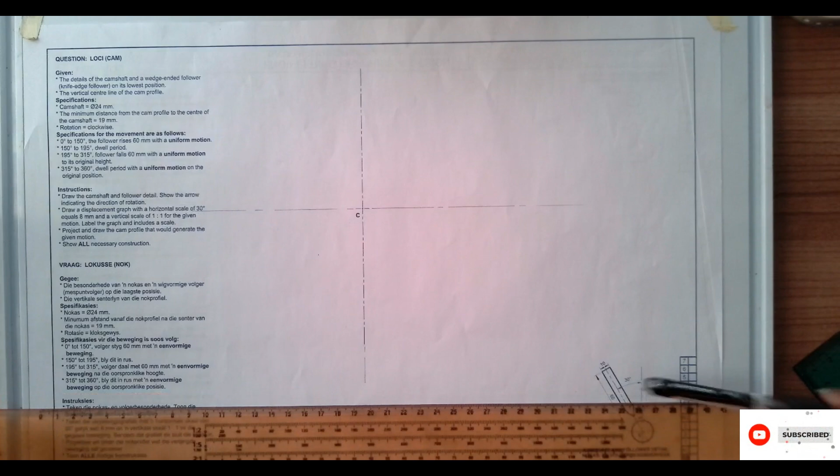Today we'll be doing page 113. We have the information here and we also have a diagram here. In the information under the given, we are given the details of the camshaft and the wedge follower in its lowest position as well as the vertical center line. So what I did, I just extended the center line that is horizontal. So you must also do that.

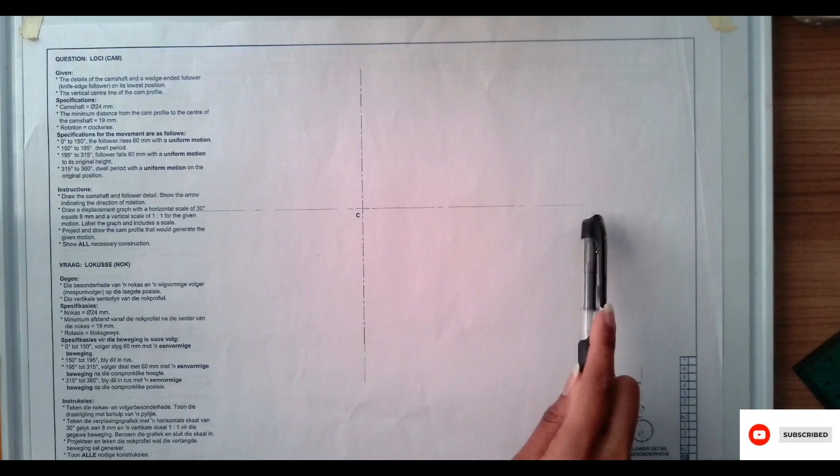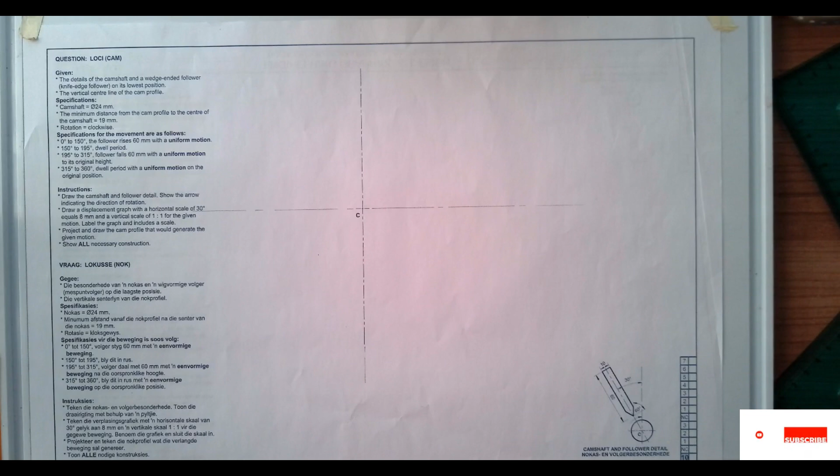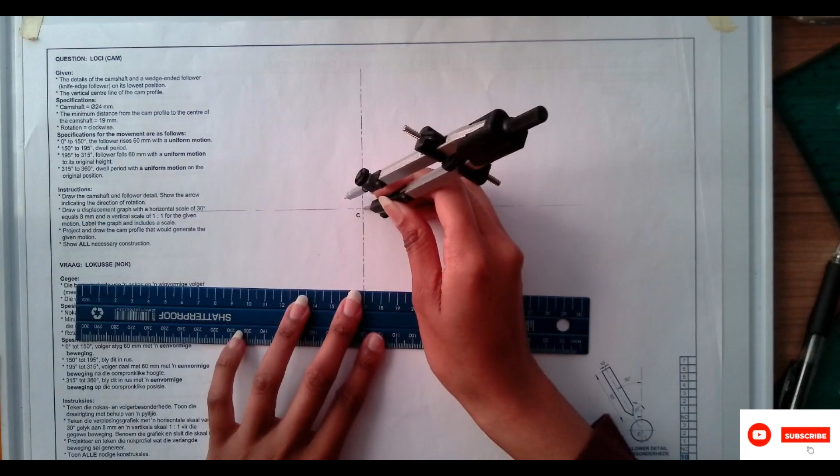And then the specifications are that this camshaft, this circle here, has a diameter of 24. Let me see if my stencil, oh gosh, it doesn't match. It means I have to take my compass, open radius 12, and then draw a circle that's 24 millimeters. Oops. Make sure that I zoom it properly. So once you have that, immediately take your set square and hatch because it is a shaft. So you want to hatch that using a B line.

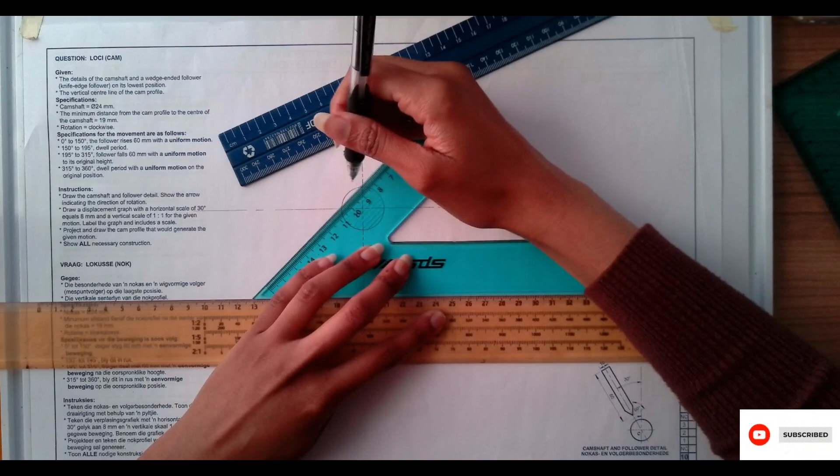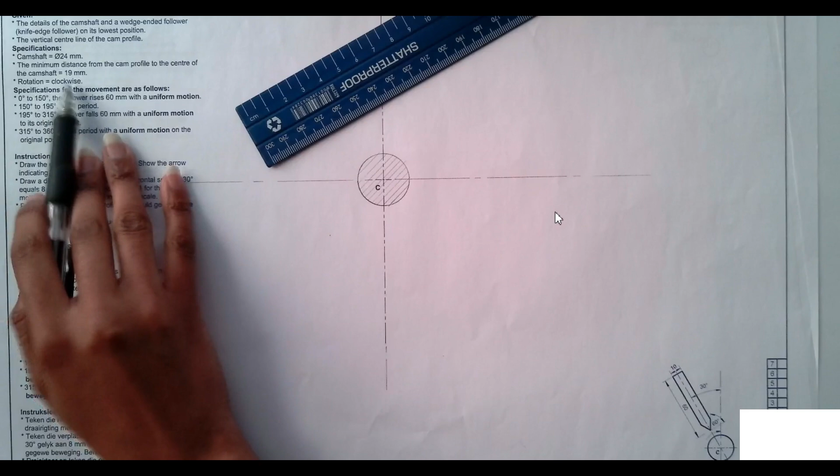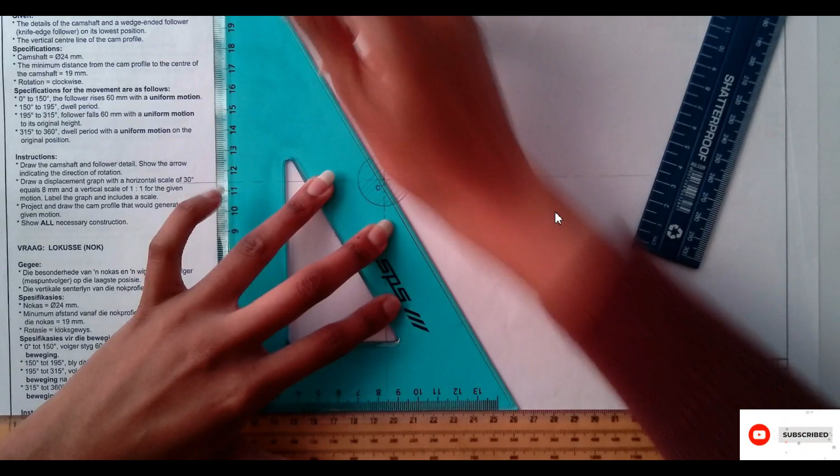So once you're finished with the hatching, you can carry on copying. We can carry on copying this part here, and we are still under specifications. We are told that the minimum distance of the cam profile to the center of the camshaft is 19 millimeters, and we can see that here there's a 30 degrees. The follower is sitting at 30 degrees, so we're going to take our 60 and draw a center line from the center. So if you put it like that, it is 30 degrees. That's why we are told that this angle is 30 degrees.

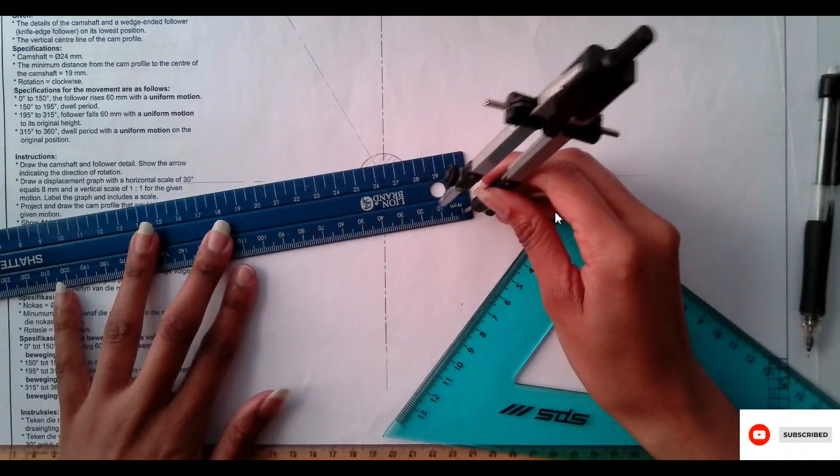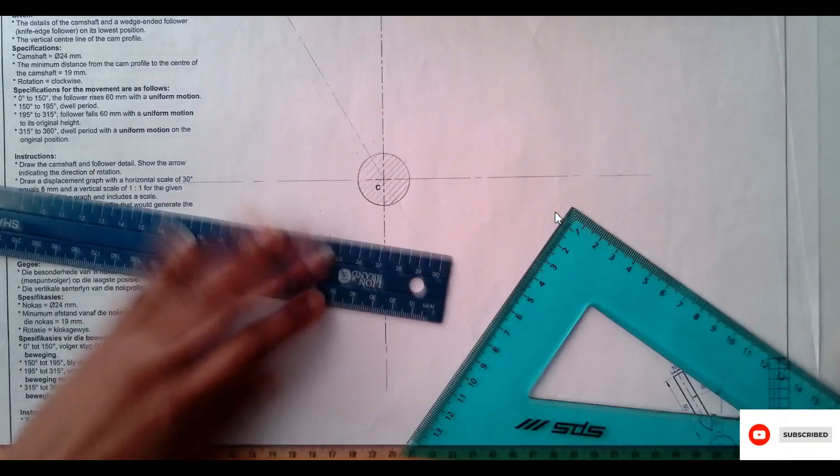And then we can start. We are told that the minimum distance is 19 millimeters. So you open 19, you place it in the center and you mark that distance. Once it's marked, then you can go out 5 on each side because it has a width of 10. So we have 10, and then from here the distance is 16 millimeters.

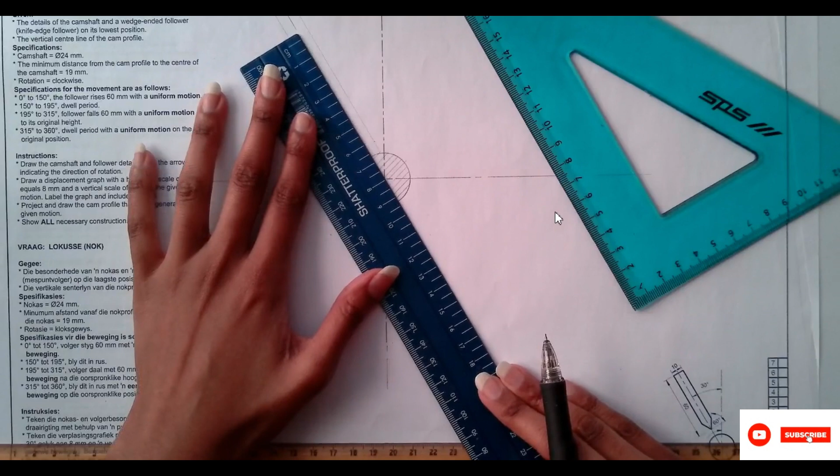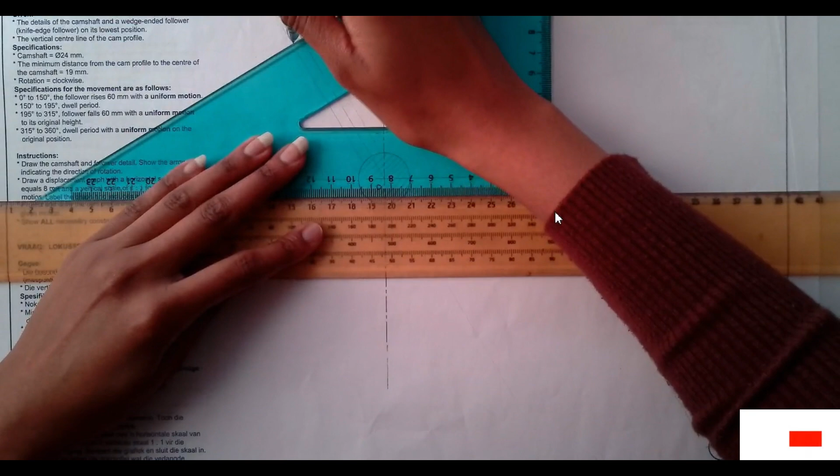So from the 19 we measure 16 up, which is there, and then we're told that the angle there is 60. So if it's 60, that means we're going to use 30 millimeters. So we have to stop. We have to have the pin here.

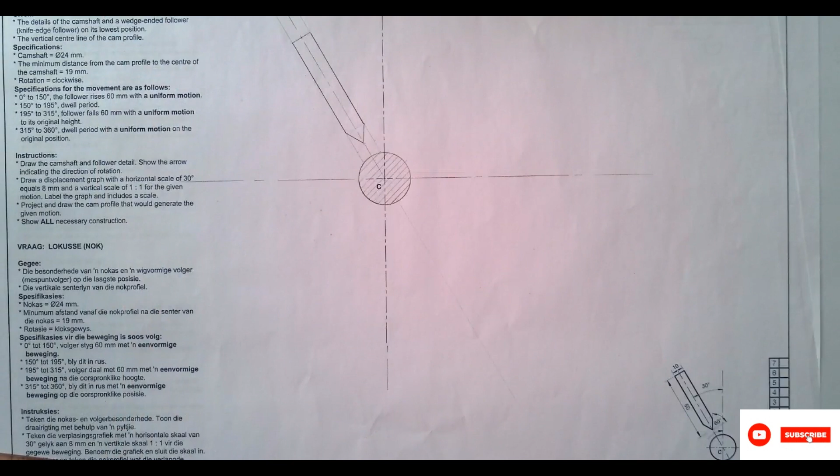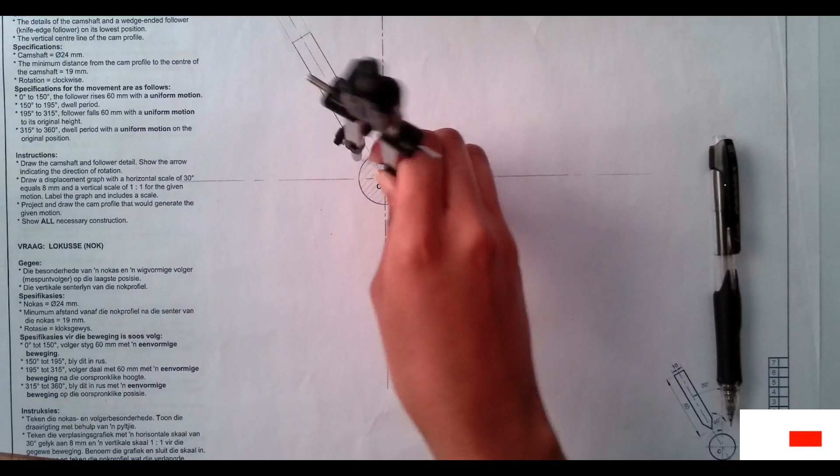And then we are told that the direction is clockwise. So immediately, from the center, I'm just going to increase that 19 and draw my direction. So these three things are very important to do: the camshaft hatched, the direction, and the follower. Any other thing comes afterwards.

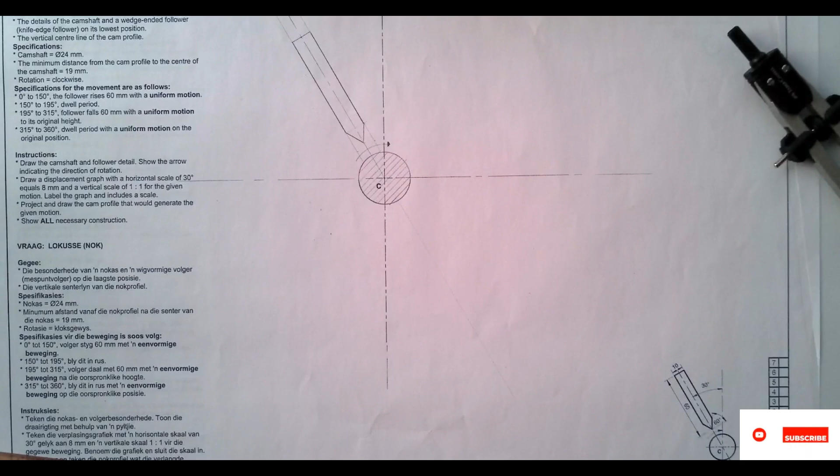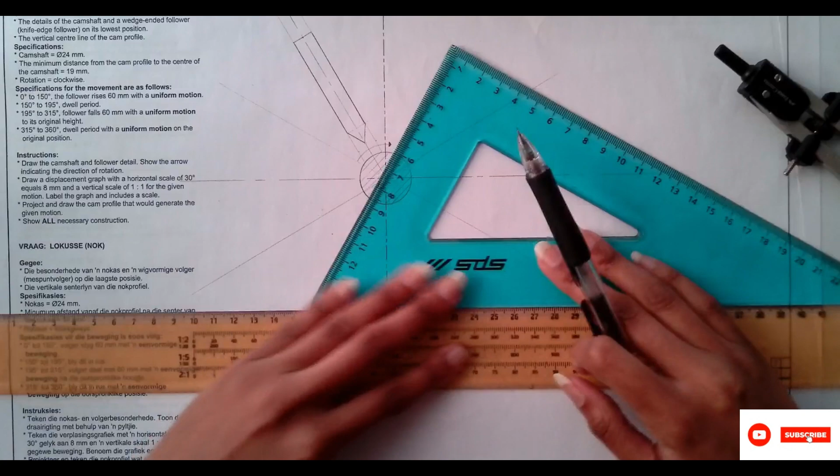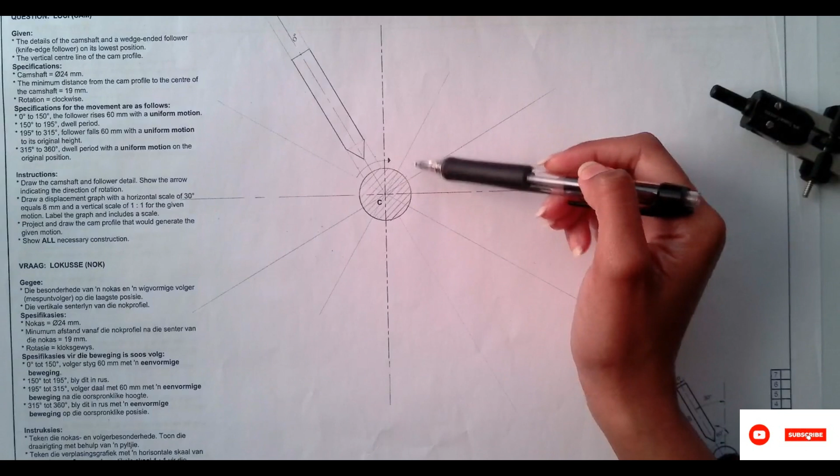Once we have done what's under the specifications, we now need to prepare for indicating the motion. We do that first by dividing this shaft into 12 equal parts. Okay, and then you always label 0 where the follower is. That is your 0 degrees. But where you go will be determined by the rotation of the shaft. So you always label in the opposite direction to the direction of the shaft. So if it's going clockwise, we're going to label the motion of the follower anti-clockwise. So I'm just quickly labeling that.

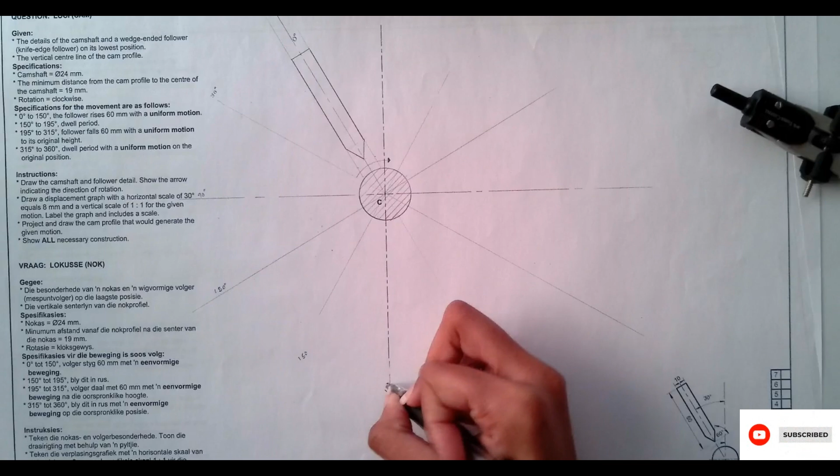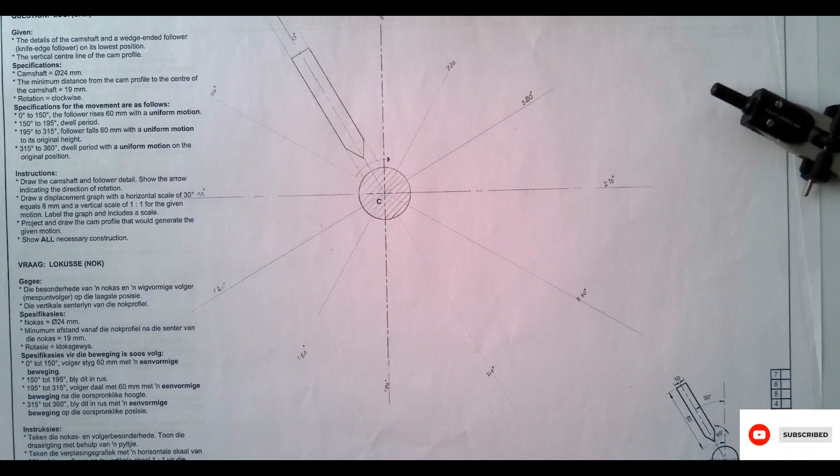Then 120, 150, 180 degrees. Please don't forget the degrees. 300, 330. This does not make sense. I made a mistake early into the drawing. My labeling was off. So I was wondering why 360 is not at 0. I didn't get 60 degrees.

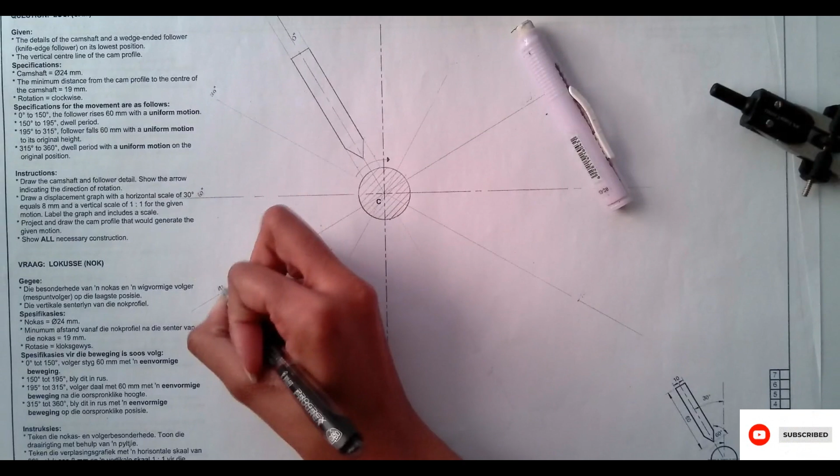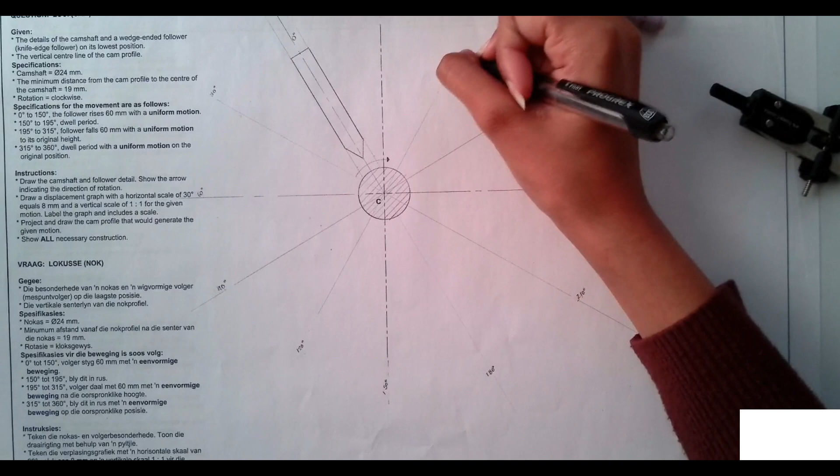90, 120, 150, 180, 210, 240, 270, 300, 330, and 360. Yes, 0 and 360 must always be at the same point. I'm sorry about that.

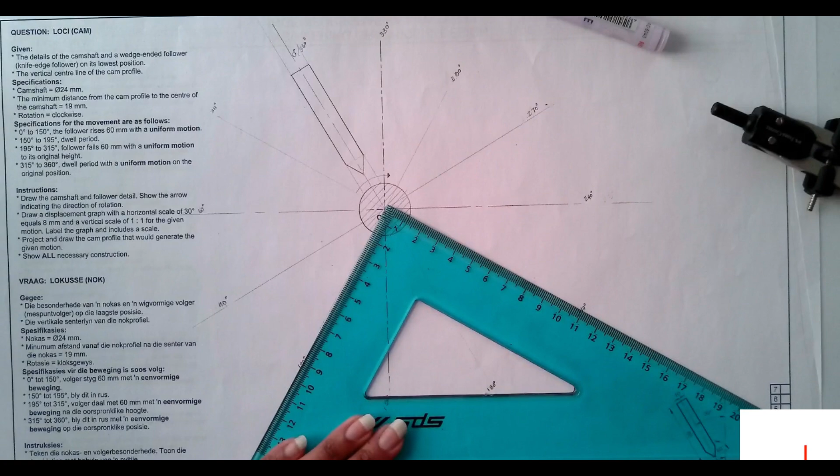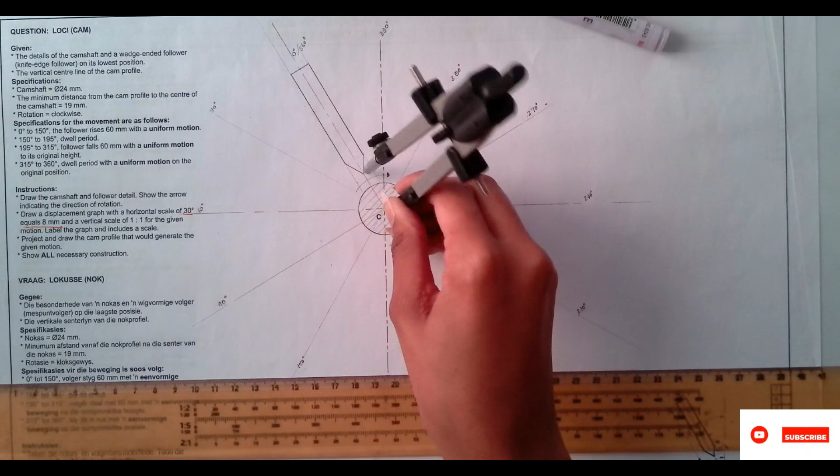Once we've done the preparation for representing the movement of the follower on the cam profile, we can now go to the instructions. We are told to draw the displacement graph with a horizontal scale of 30 degrees equals 8 millimeters, and the vertical scale is 1:1. So in order for us to get the bottom part of the displacement graph, we have to put our pin in the center and then go to the point of the wedge follower and then transfer that end point there to the center line.

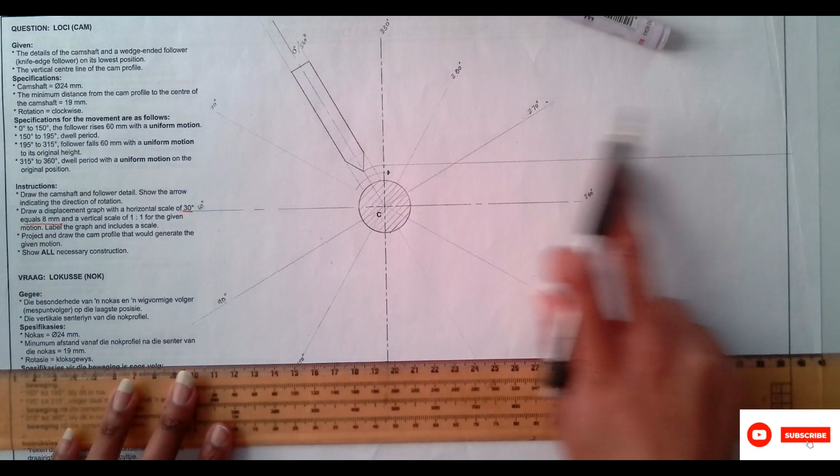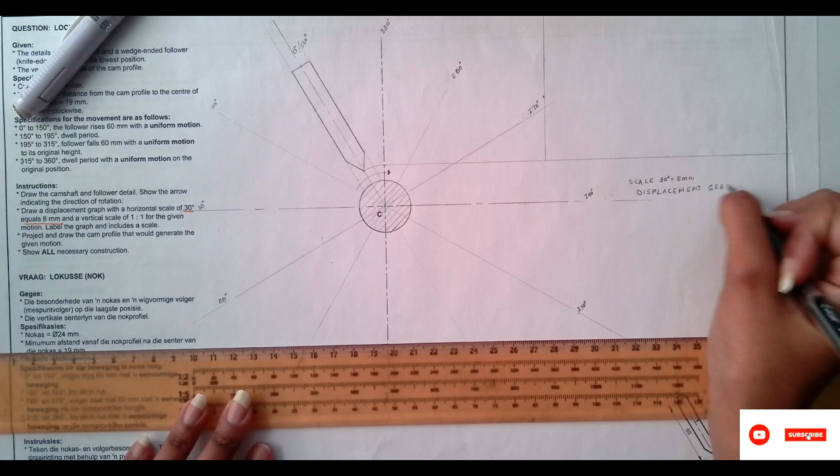Once that is done, you transfer that across. So please always make sure that the bottom part of your graph is in line with the end point of the follower, especially if it is a wedge follower. For the roller follower, it's a different thing. So the scale here, we are told that 30 degrees equals 8 millimeters. This is a displacement graph. You must always label it. There's marks for that. Displacement graph.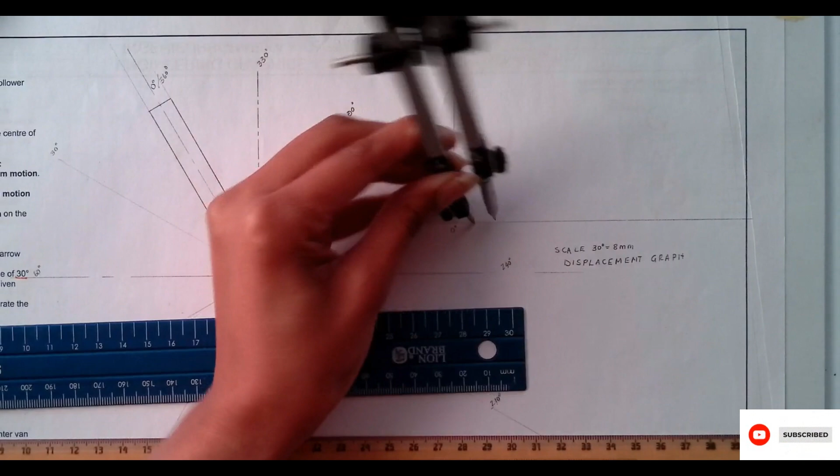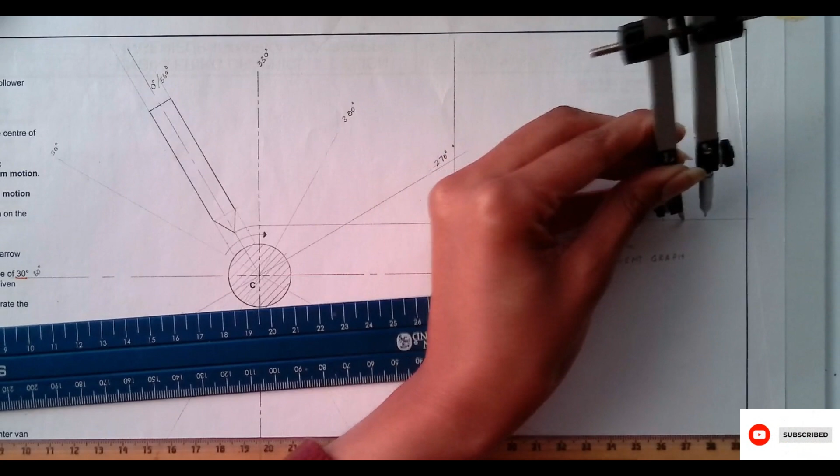So I'm now going to mark 8 millimeters 12 times from my 0 degrees. Just make sure that there's a decent space between your graph and where your profile is going to be. 8 millimeters. Then I'll mark it 12 times. Then label them 30 degrees.

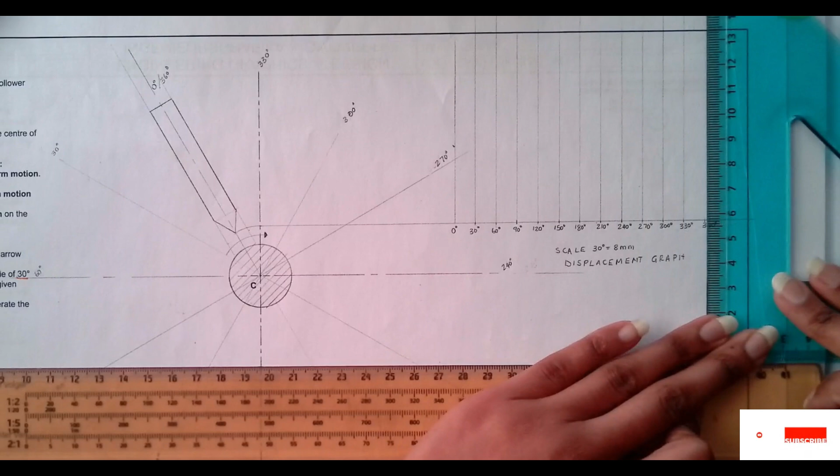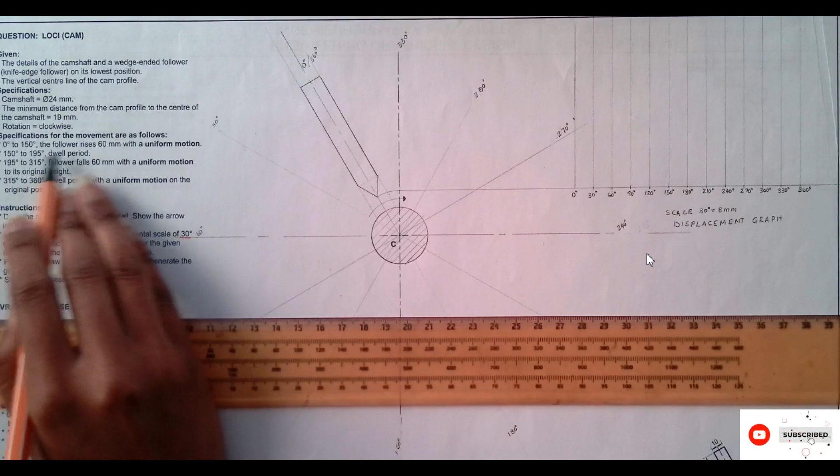So that is our graph. Now we need to plot our points. And now let's read the specifications for the movement of the follower: from 0 to 150 degrees, the follower rises. That's the key word, with uniform motion. And then there's a dwell period, and then it falls again, and then there's a dwell period. So those are the key words that we need to ensure that when we read, we know that

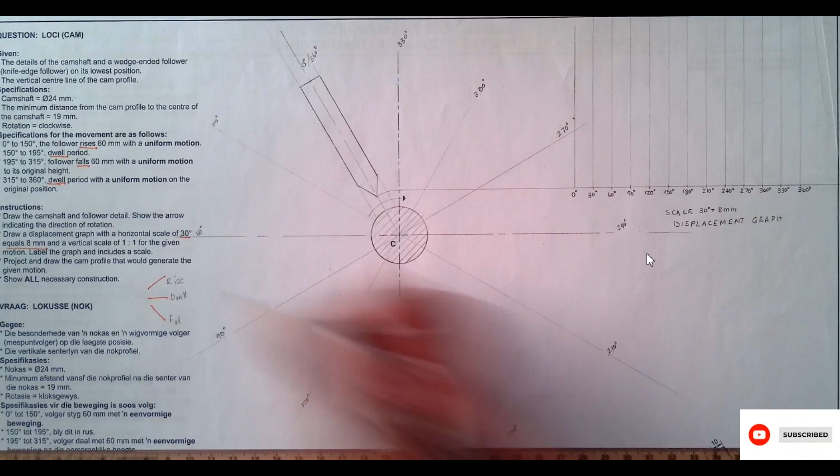once again, we have a rise, we have a dwell, we have a fall. So those are our key words: rise, dwell, fall. So that's how we represent those motions in the graph. So now let us begin. We are told that from 0 to 150, there is a rise of 60 millimeters.

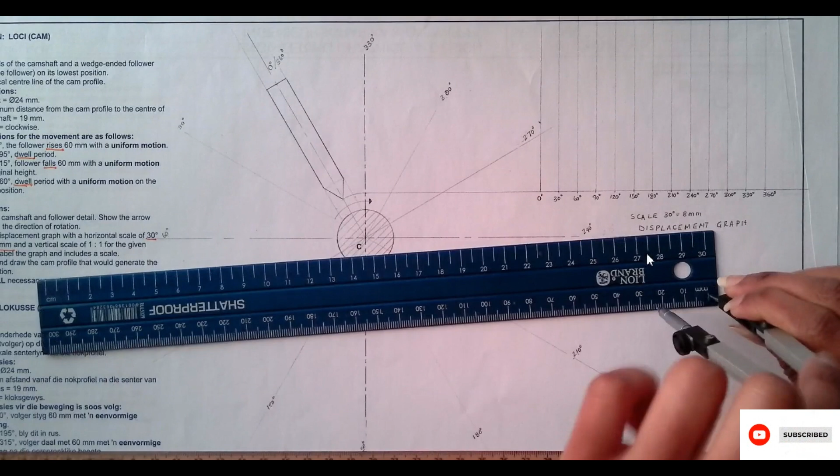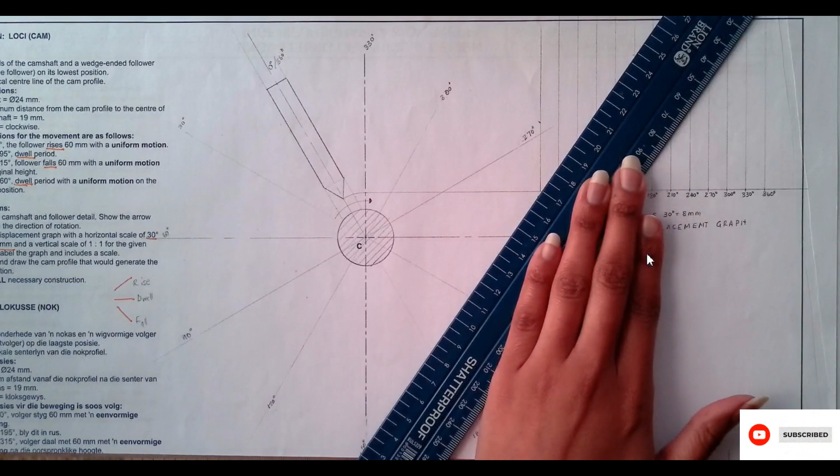You can take your compass or your ruler, it's up to you, and then measure 60. And then they're saying from 0 to 150. So at 150, you are going to mark that 60. And you must then indicate the rise. There is a rise. If you are unsure, you must always start with constructions first.

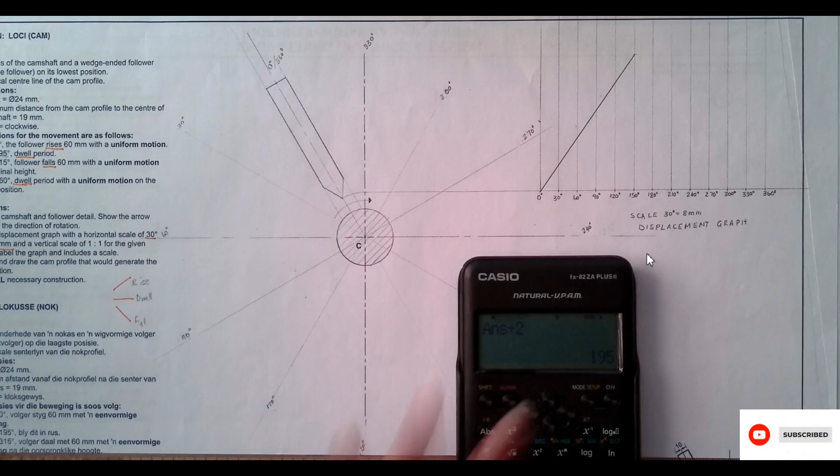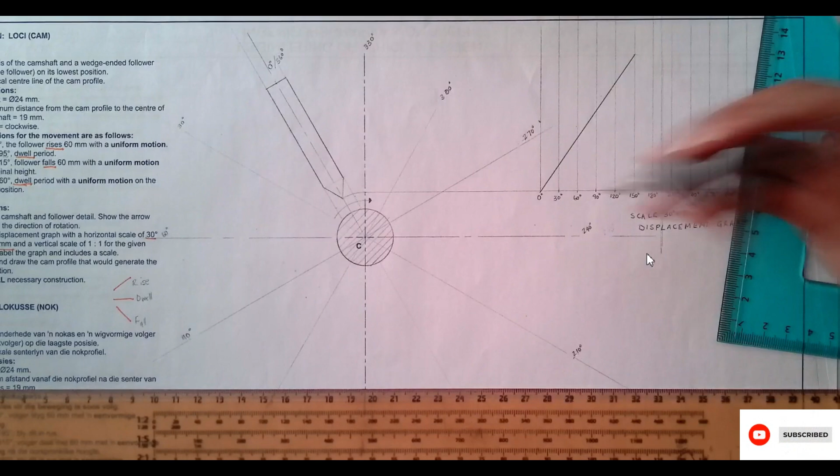And then we are told from 150 to 195. 195 is an angle that can be between 180 and 210. But to confirm that, you say 180 plus 210, add them, divide that by 2, it gives you 195. So since our displacement scale is 30 degrees equals 8 millimeters, we're going to get half of this 8 millimeters to get 195. 195 is the midpoint. So 4 millimeters is there. That's not the one. So this is our 195 degrees. And then at 195, we can now indicate our dwell from there to there.

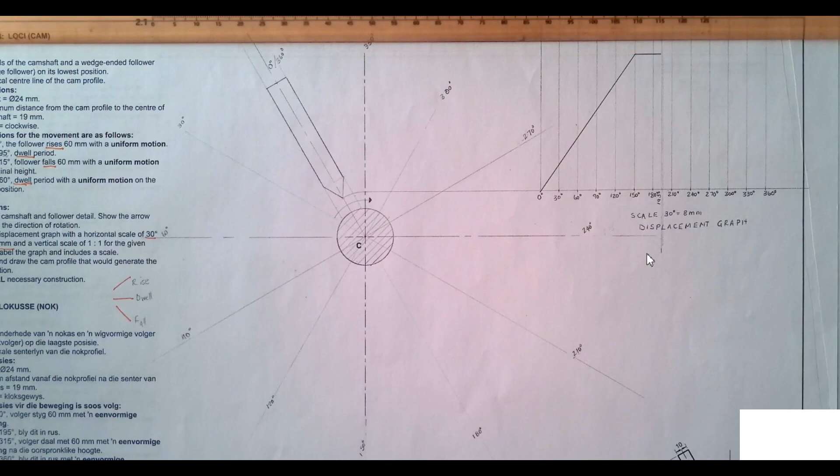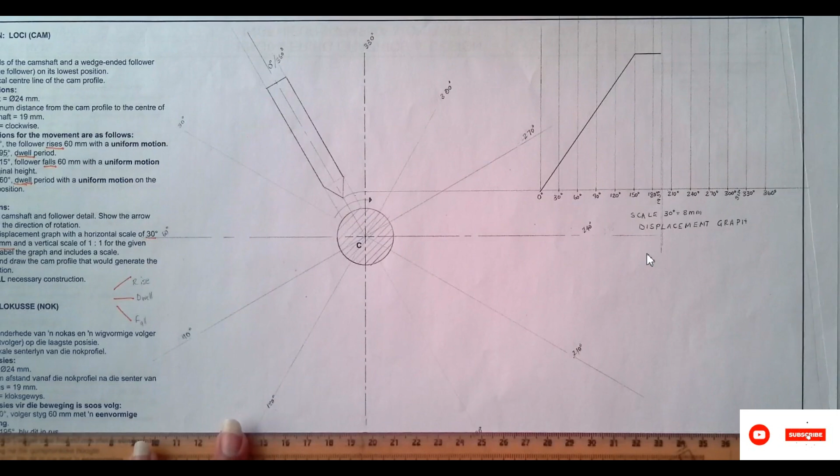And then the third movement, from 195 to 315, the follower falls 60 millimeters. That means we need to get another 315. 315 can be between 300 and 330, and to confirm that, we say 300 plus 330 divided by 2, we get 315. So that means, once again, 4 millimeters between 300 and 330. So this angle here is 315 degrees. There is a fall of 60 millimeters. So we are taking that dwell that we had there

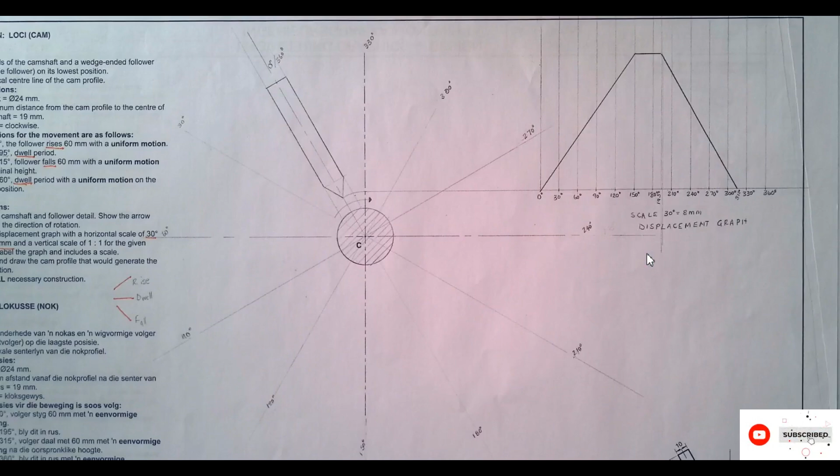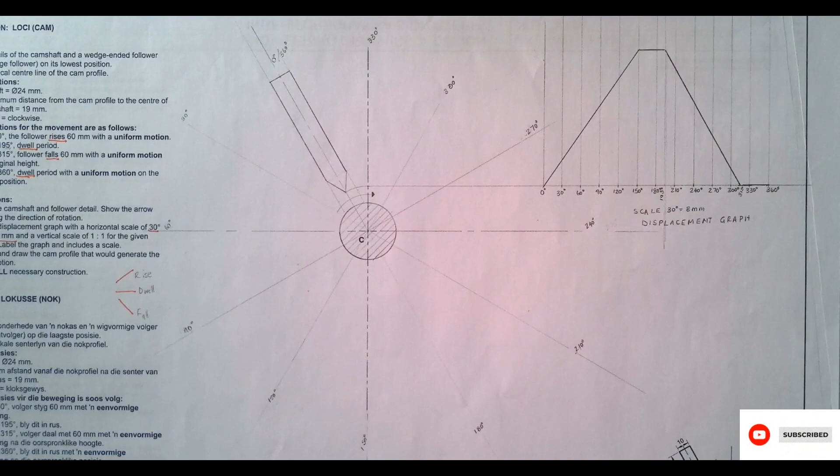to now fall back. And then the last one tells us that from 315 to 360, there is a dwell. So that means we need to outline the bottom part of the graph. So that is the displacement graph. Once we have the graph, now we can represent the motion where the shaft is. So you're going to start with 0 degrees. You're going to have a point here already, which is pretty obvious. Then 30 degrees, we use the vertical center line.

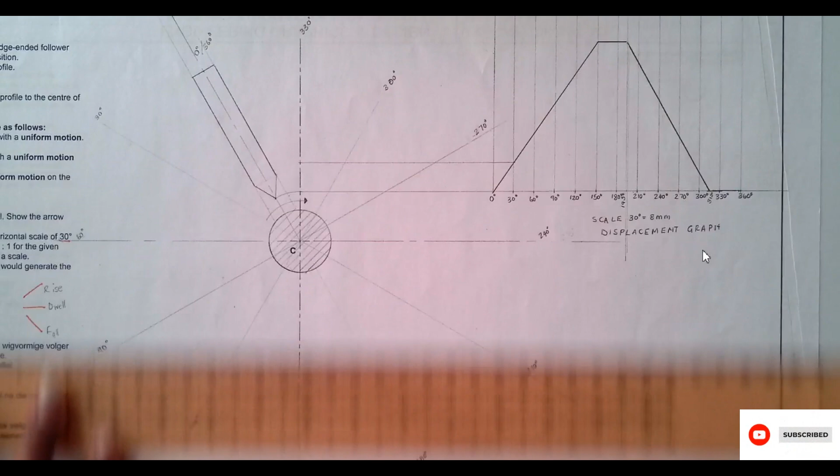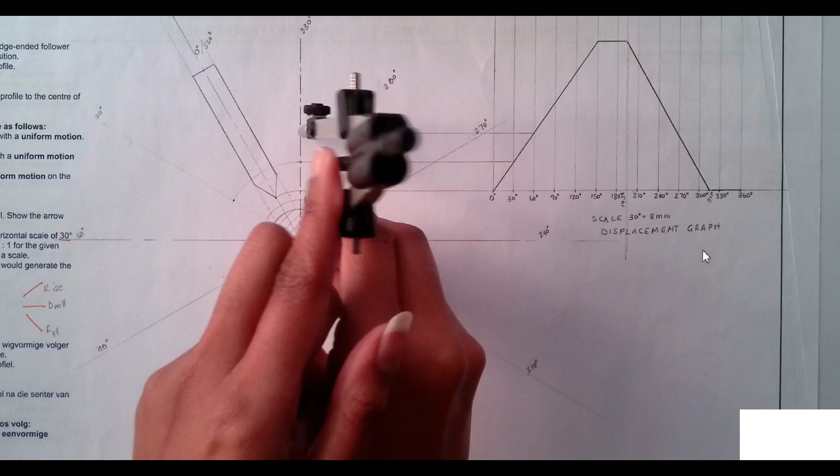At 30 degrees, you open from the center line. Then you have a point at 30. 60 degrees, you have a point at 60. 90 degrees.

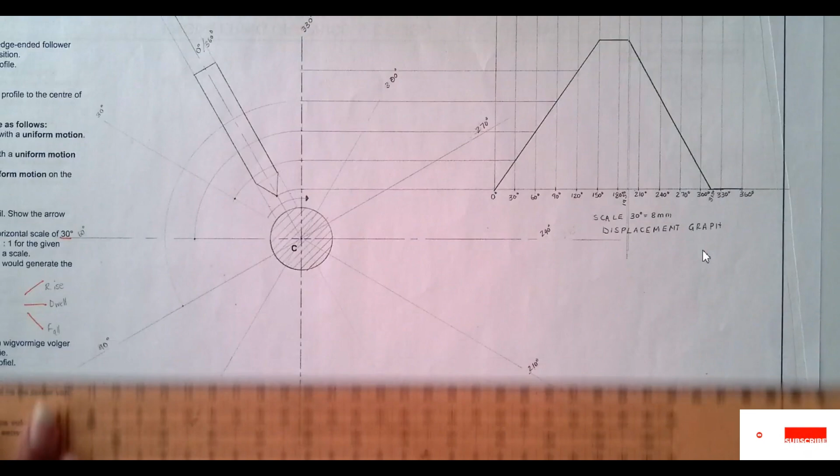Point at 90. 120. And then that's where our dwell starts, from 150 all the way to 195. But before that, let's get our 195. So for 195, we need to divide the angle. We know that it is this angle here.

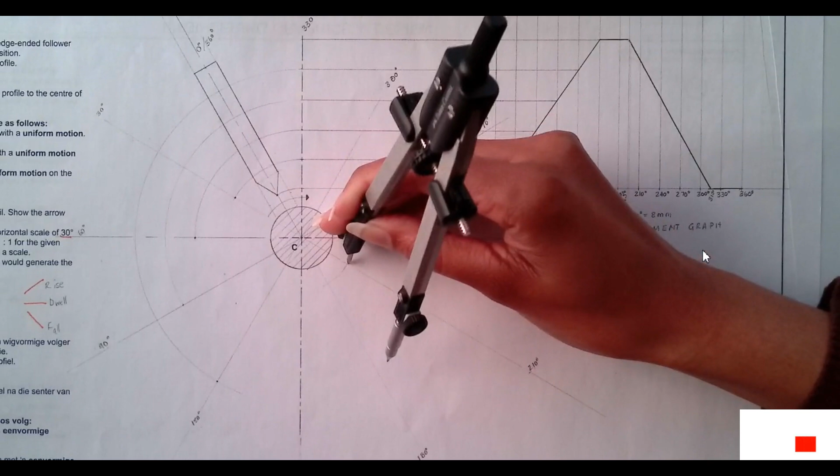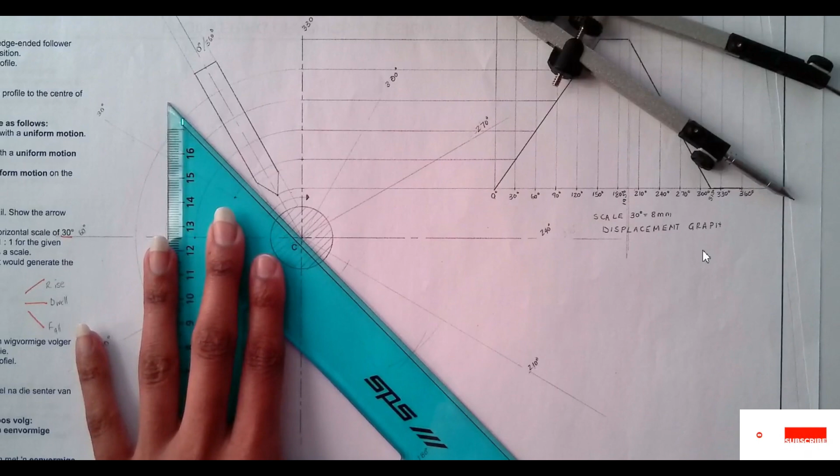So at any distance of your choosing, you're going to draw an arc between those two angles, and then at another distance, open it a bit wider, strike an arc where your two arcs intersect. This arc on this side is not visible. Where they intersect, we're going to draw a line that's passing through that point. All this is done in construction, please. And then this is going to be your 195 degrees.

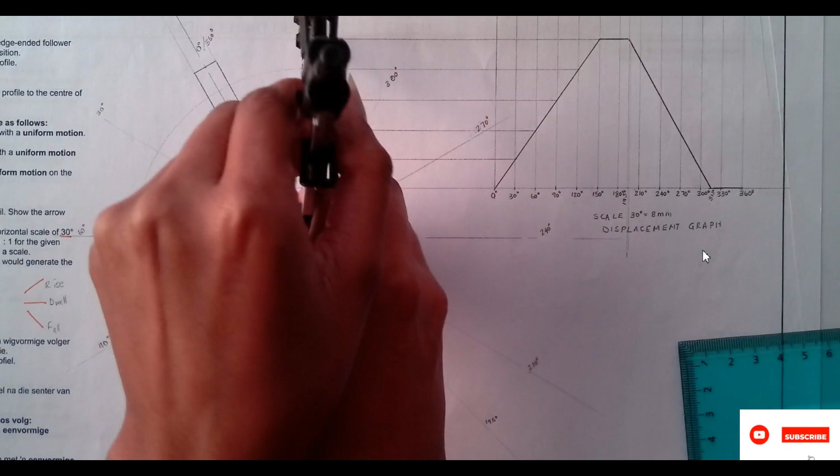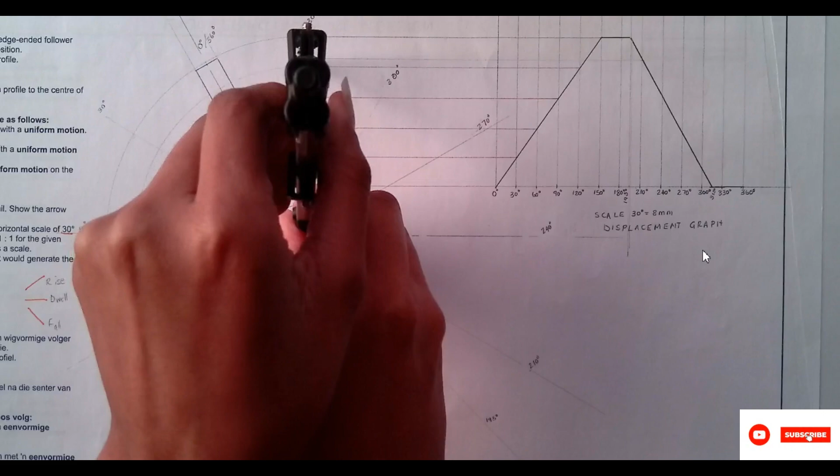Then once you have that, you can now take your 150 to 195 point, which is here. So 150, 180, all the way until 195. So there's a point here, and a point there. And then 210. So now that is to represent the fall. 210 is here. And then 240.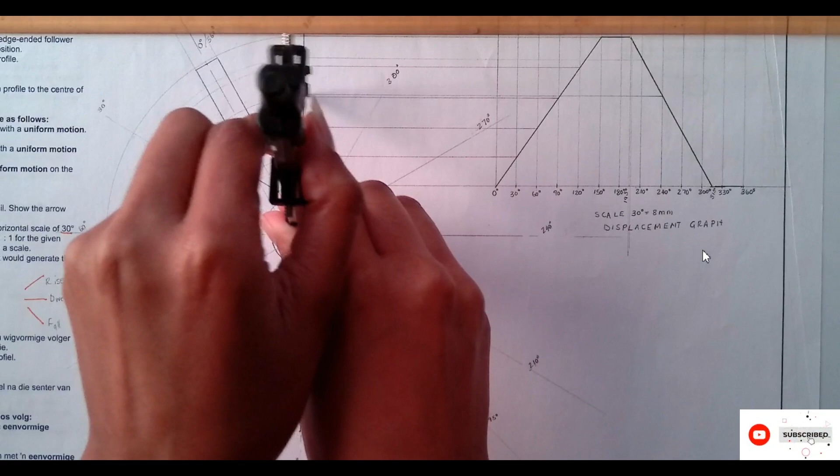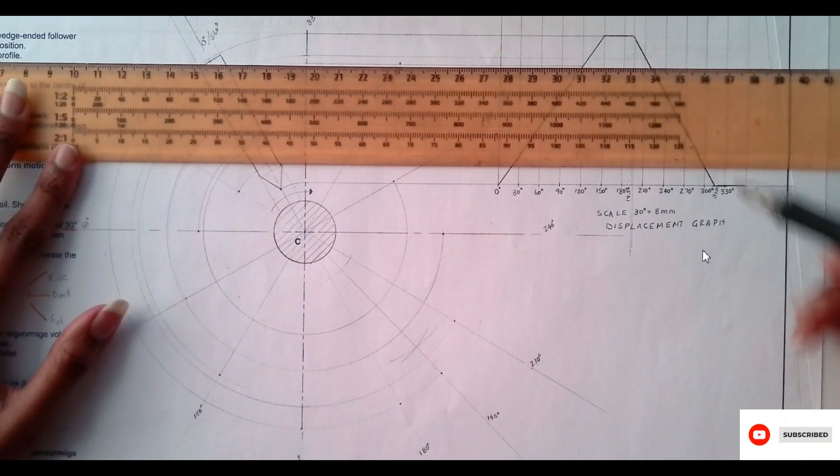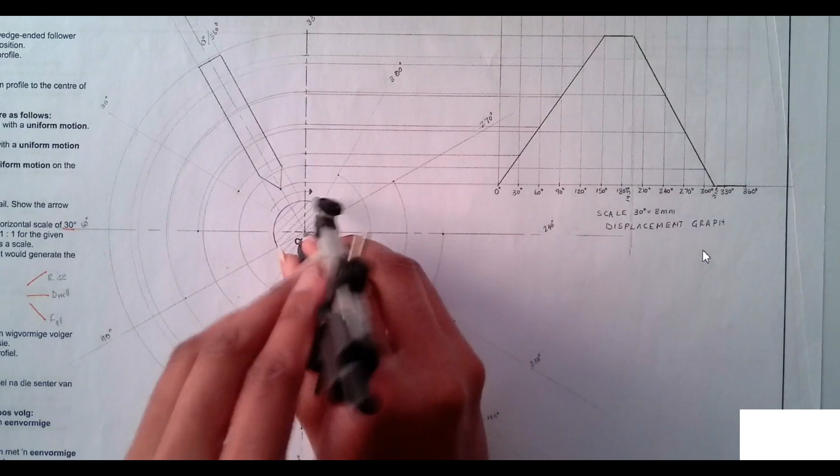270, and then 300. Then there's 315. So 315 is once again between 330 and 300. So at any distance, we're going to choose an arc. Then we're going to come, strike an arc, where the arcs intersect. We got 315.

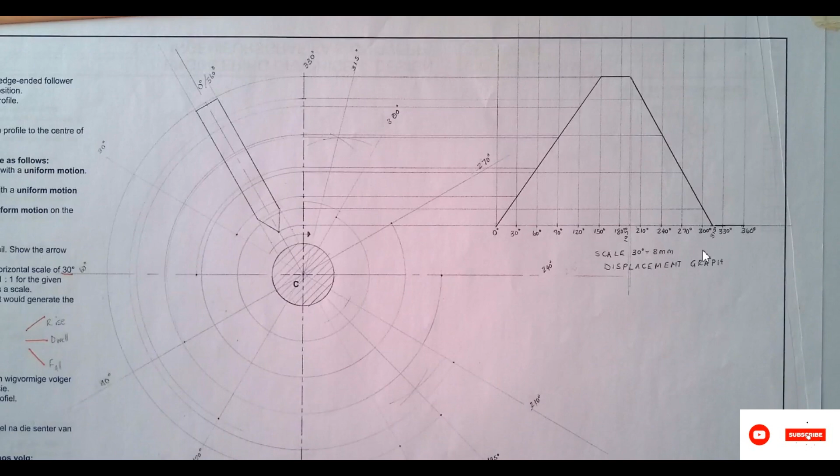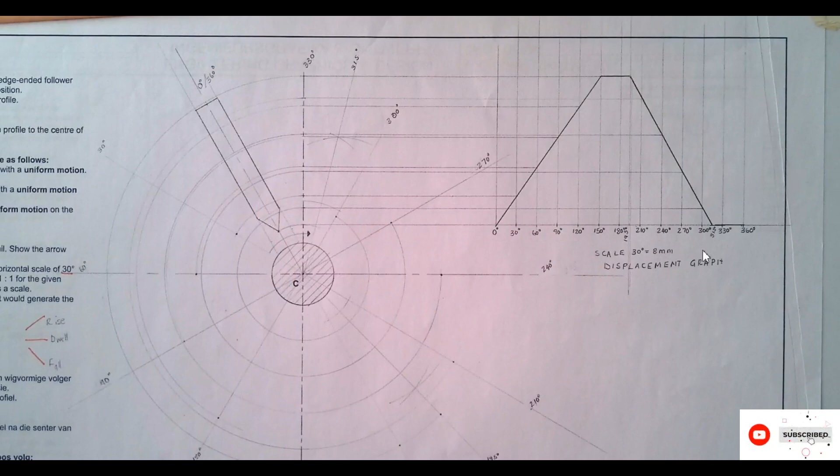315 degrees. Then from there to there, it's a dwell up until 360, which is already brought here. I just need to indicate it. So you're going to have this dwell, which is here at 360, 330, and 345. So it's from here, there, and back to 360. So those are our points.

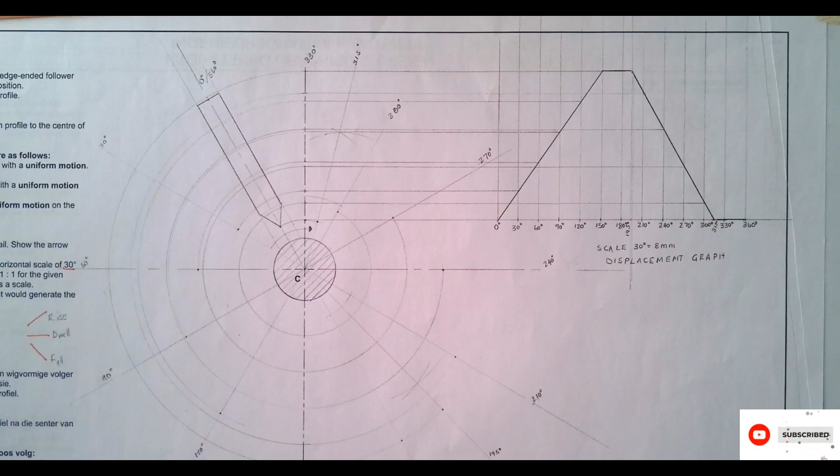I'm just quickly going to join them. So let me just use my compass to indicate the dwells, because those ones are at least clean enough to be done with the compass. You're more than welcome to use your flexi curve, please. You are encouraged to use it. And then you have another dwell from 150.

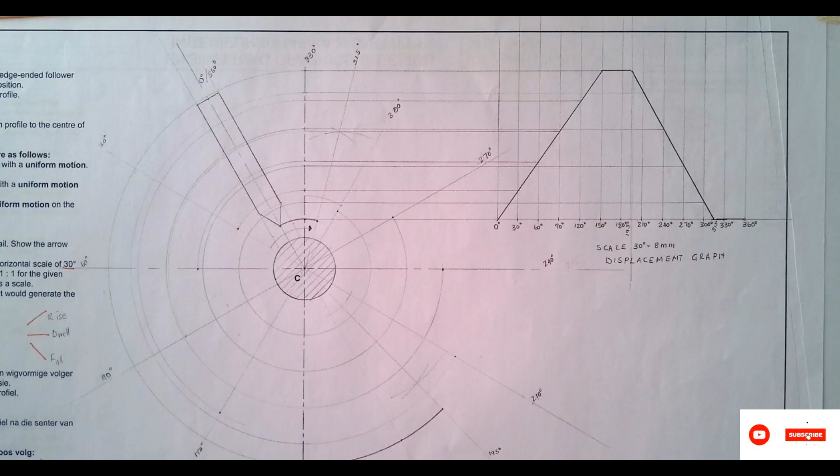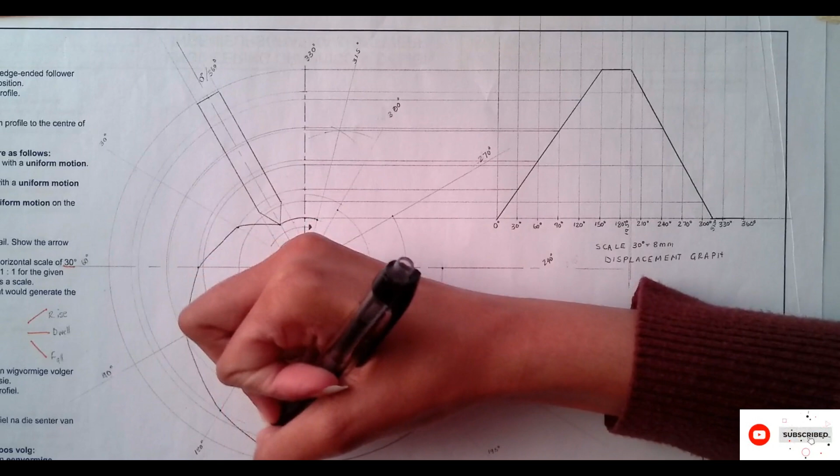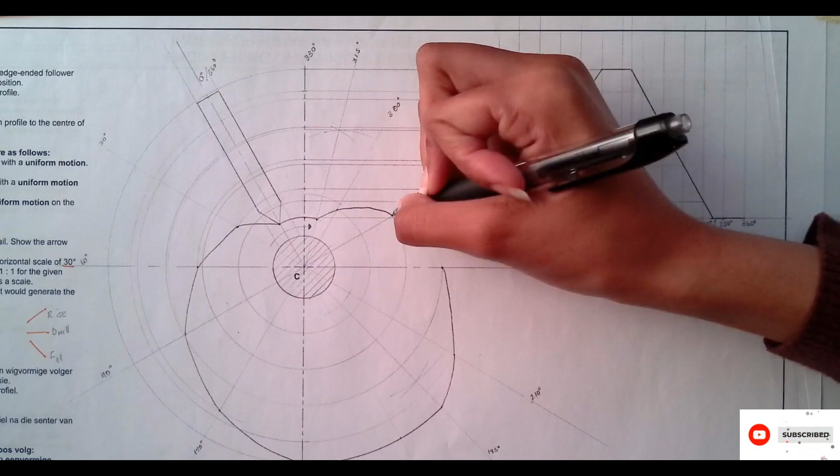So I need to make sure that I use my freehand properly. And then go from here. So that is the cam profile and the displacement graph.